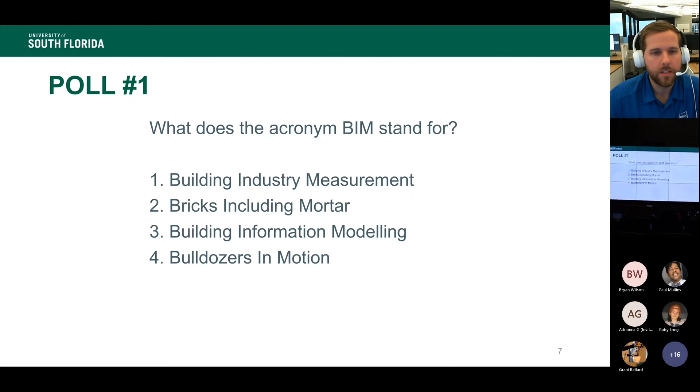So I see some of those responses coming in, that's good. We're going to transition here to, I guess, spoiler alert, I see a couple more responses coming in. So for those that haven't submitted yet, you're going to get a little teaser here, but it does stand for Building Information Modeling. So what that means is really in the context of these two parts of the industry we're going to focus on today, which is the design phase and the construction phase. There's a roadmap and a life cycle of these jobs that you guys are going to see and interact with on your campus. But to give a high level overview of that, this is really just a graphic that we like to use to help explain how building information modeling really impacts both the design and the construction phase.

So whether you're really in the beginning stages of a project with programming, to conceptual design all the way out to detailed design that you can see there on the right hand side, and then transitioning over into the construction phase where you're starting to build, obviously from that model. That's really where we start to get into some of these items as it relates to actually physically building that out in the field. So we like to show this as a roadmap of how building information modeling is this concept that runs deep through design all the way into construction, which brings up our next topic here, another acronym, VDC.

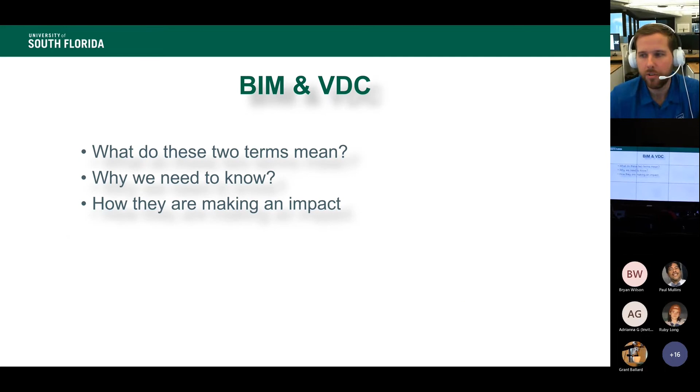So the first one being BIM, we already talked about it a little bit, which stands for Building Information Modeling. The key to this definition is that it's a noun - it's a thing or a tool, or in some cases, consider it like a hammer, right? Think of it as something that's actually physical. The key words we wanted to highlight in this definition were a digital representation of information. When you think about BIM, or Building Information Modeling, it is really a noun, or a thing, or a tool.

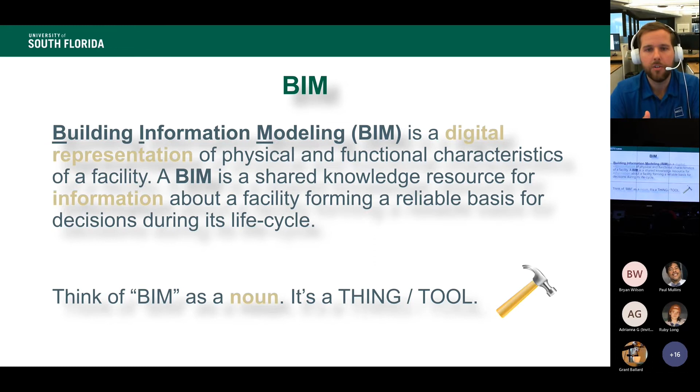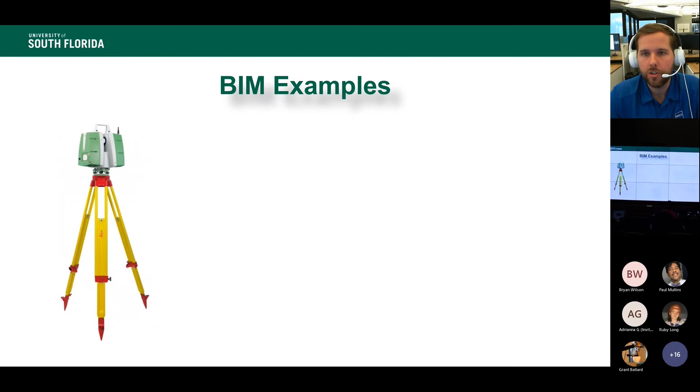The important part is to understand it is just a thing. You don't just throw Revit or modeling into a project and expect it to change or expect increased value - it's a part of that process. So another tool we would use - if Revit was more on the design side - on the construction side, another BIM tool we would use is a laser scanner, which you can see here. Typically this is known as a surveying piece of equipment, but it's something our construction staff uses to understand the built space we're either continuing to build on or starting to build from.

And so I think this is a video here that Alejandro, if you click on it, will start to move around and show you our ability to recreate this space. A lot of people have called it either a digital twin or a digital representation. I know you're getting a little fuzzy here, probably on the Teams chat or in the room, but really this is a digital reconstruction of the space, and that's done with a building information modeling tool - a laser scanner.

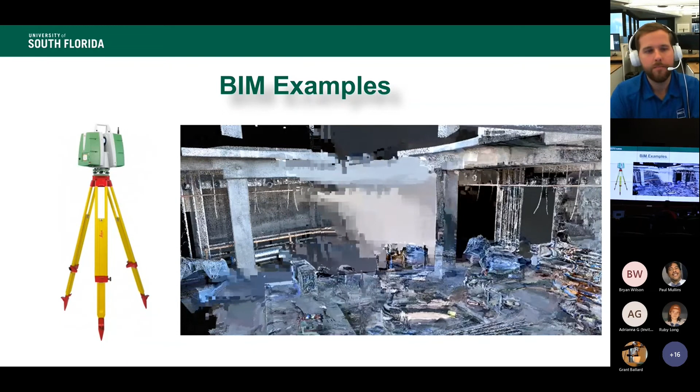So what I wanted to show you was more of the architecture side of it, with what Revit is as a BIM tool, and then on the construction side, a laser scanner, which you're seeing here. This is kind of a preface to a couple things we're going to talk about later in the presentation, but wanted to give you an example of building information modeling - it's a thing, it's a noun, it's a tool. Architecture-wise, Revit. Construction-wise, a laser scanner in this example, to give you that realm.

So the other acronym we wanted to talk about was, what does VDC mean? How does that play into it? So VDC stands for Virtual Design and Construction.

So a list here that we wanted to show is really some examples of what that means, or what are some VDC processes on the architecture side and on the construction side. What you're going to see on this next slide is just some examples of that.

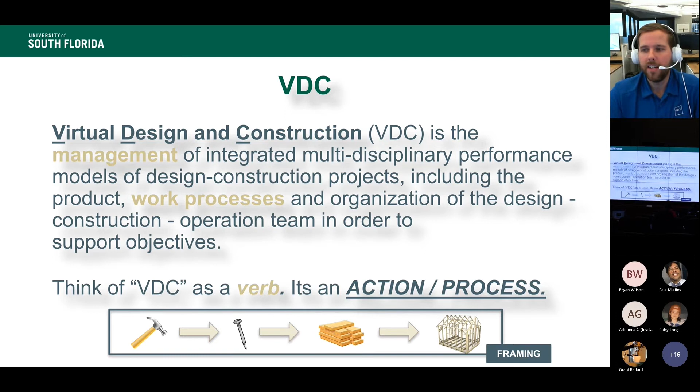So as we get to some of those actual or tangible examples on the next slide, what we really wanted to show you was this idea of what does this actually mean? What are some VDC examples or processes on the architecture side and then on the construction side as well?

Whether that's site logistics or layout or virtual mock-ups to see what these things are going to look like, again we're taking all of these tools in the BIM world and applying them into processes into the virtual design and construction world. So that's really what we wanted to give you guys, a baseline of understanding that there's a lot of acronyms in the construction and architecture industry, but two that are really important and applicable here are BIM, or building information modeling, and VDC, which is virtual design and construction.

So what I'm going to transition to is Alejandro, and he's going to talk a little bit more about what that means and how we take some of these VDC processes into action in the realm of considering what that looks like for design and construction.

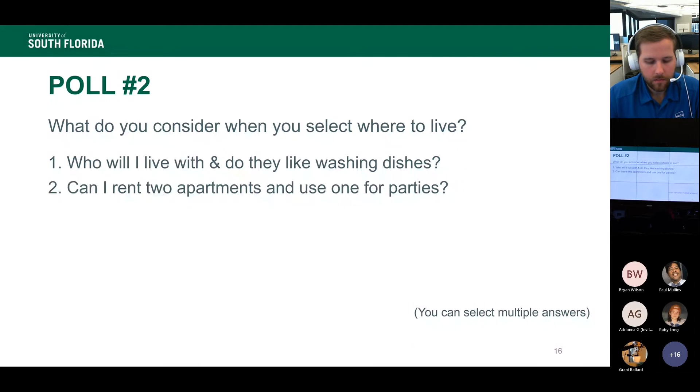What do you consider when you select where to live? I don't know if this is the first year of you living here in Tampa, but what did you consider when you moved to Tampa, or to a new place to live? Do you consider who will live with you, and do they like to wash dishes? Maybe. Do you consider renting two apartments and using one for parties? What about, does the apartment have hyper-fast internet because you want to watch movies on Netflix and stream video games? Or do you just say, I should have my apartment or house designed by an architect? What do you normally do?

BIM Execution Plan is something we do to start out a project, to plan a project. So just the way you guys are planning out where to live, we have a BIM Execution Plan that talks about who you're going to live with, right? Who are the team players?

Do they know what you need for them to know in order to be part of your team? Do they have the capabilities? Do we have the software? Do we have the hardware? Do we have all the technology needs in order to do this project?

In a way, that's what you think when you're looking for a place to live. USF has their own BIM guidelines and standards. A lot of other companies and institutions have this. So if you work for a hospital, like the VA hospital, or the U.S. Army Corps of Engineers, they will have a BIM guideline. They will have a standard of how they want the projects to be.

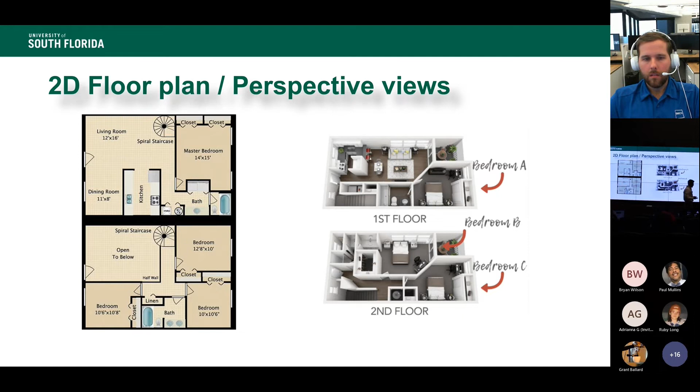So again, we're going back to the apartment you're going to live in. What do you normally do? You see this 2D floor plan, right? It tells you where things are at, where the bedrooms are, the restrooms, bathrooms, the kitchen. And nowadays, a few companies provide you a 3D and isometric view of that. That's pretty common, like when you go look for a house on Zillow.

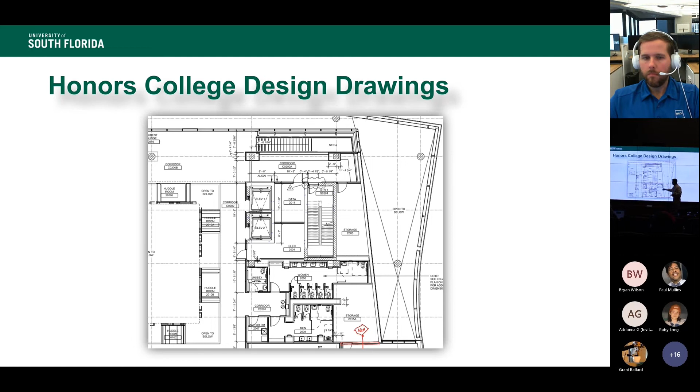This is a floor plan of the Honors College 2D drawing. It's just flat, just lines. It's showing us that level, this specific one, level 2. This is a zoomed in version of level 2. So we have the restrooms, corridors, some elevators and stairs. It's showing us in 2D drawings the location of that.

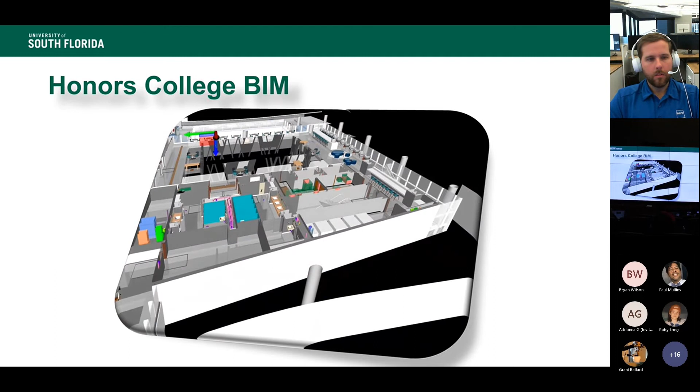We can also do that in a 3D model, and from the 3D model we can actually export it. So the information from the model can be exported. This is just a little video of that model where we extracted the 2D drawings from. This is the Honors College, where at some point you'll be working, having a coffee, going to the restroom, walking up and down the stairs.

So there are design drawings, just as we mentioned, and there are fabrication drawings. What's the difference between both of them? Anybody know?

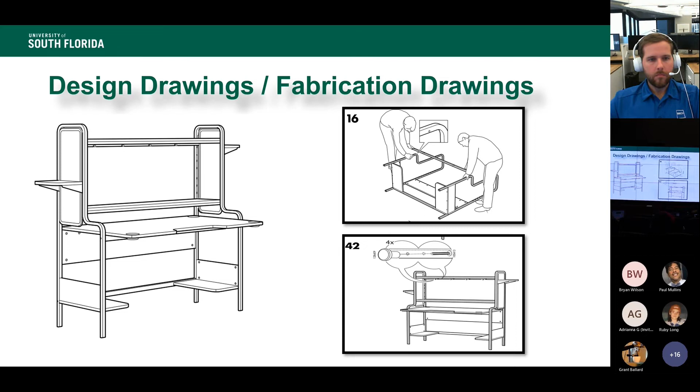Okay, so it's more of a detailed version of a drawing. Perfect. So most of you maybe have bought furniture at IKEA, and you know how those manuals come, right? 42 steps to build that. What is that, I think that's like a desk, a gaming desk, right? 42 steps for you to have a gaming desk. So remember we talked about knowing your team, and if that team knows how to wash dishes, well this might come in handy. You might need to work with and live with someone, so they can help you put that furniture together. So that is right, thank you for that.

BIM has dimensions. Today we're only going to talk about 2D and 3D dimensions, but it also has more. 2D, we talked about the drawings, just floor plans. 3D is that geometry, right? The 4D is like an animation of that. So when you're playing video games or watching those animated movies, it's an animation of the project, of a building, of how it's going to be constructed, and it's tied to time.

Number 5, it's cost. So just like if you go to an Amazon store and you can buy certain things, you have a cost tied to that information or to that object, to that 3D object. 6D could be sustainability. So nowadays everybody has an Amazon device at home with smart devices you can turn off and turn on. Sustainability could give you information about the source of that material, where it's coming from. It could be used for LEED.

LEED certification. And 7D, a lot of people in the industry say it's only 6D, there's no 7D, but it's actually evolving. Now we have 7D, we have 8D, we have more. But facility management is now, you have a building that you can have information for your facility management tools.

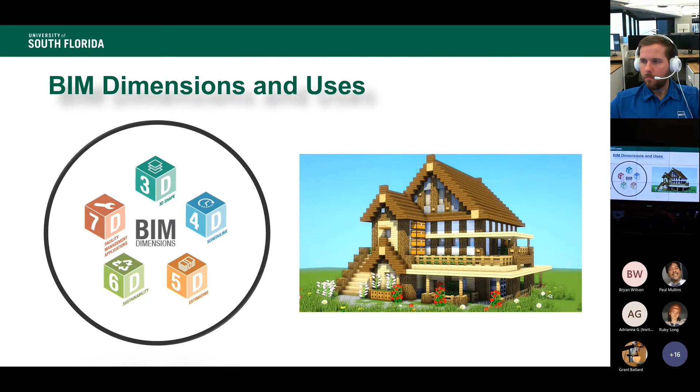So probably you guys have played Minecraft, right? That's just a 3D representation of a house, but it's not really detailed. We don't have 4D, 5D, 6D, or 7D in that, it's just geometry, just generic boxes. So that's important for us when we're modeling. We want to define what we're going to model. Can we have a box representing that house, or can we have the actual perfect geometry of that figure?

So let's talk about a kiwi. Everybody knows a kiwi. The LOD would be the level of detail.

So how do I want that kiwi to be modeled? Can it be represented by a cylinder, by a kiwi, or by a box? How do I want that to be detailed?

And then the information, right? When you go to the superstore, Publix, or any superstore, you look at the kiwis and you know where they're sourced from, right? They could be from New Zealand. You can know the price, but that's all the information you know. You don't know the color, you don't know the smell, and the expiration date. So you might want to have more information in your 3D model, in your BIM model, your information model.

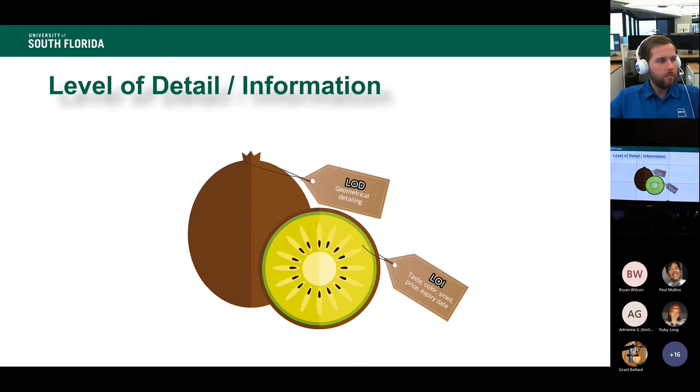That's part of the LOI. I'm going to hand it out to Stephen. Thank you.

All right, good with the microphone, Steve? All right, great, thanks. Hey everybody, Steve Blumenbaum. I'm the Director of Construction Engineering for Walter P. Moore, and we were the structural engineer on the USF Honors College.

So this slide is kind of interesting. Out of curiosity, how many of you are in the architectural engineering, building construction industry major? Okay, a few of you. That's good.

So the industry is sort of on the cusp of a transition between two different paradigms, I think. Historically, like Alejandro was saying, buildings were drawn in 2D, right? And then somehow they became physical 3D objects. And right now, given where we are with technology and speed of projects and what we're capable of doing virtually, we are transitioning from 2D to 3D.

We're going straight to a 3D virtual representation of the project, then to a physical representation. This is sort of like underneath the hood, what we're doing these days to try to get there. Historically, on the top left-hand side of the slide, there's a design team saying we've put together a design model that's at a certain level of development, not ready for fabrication, but good enough to do drawings, that we spent maybe years or months making.

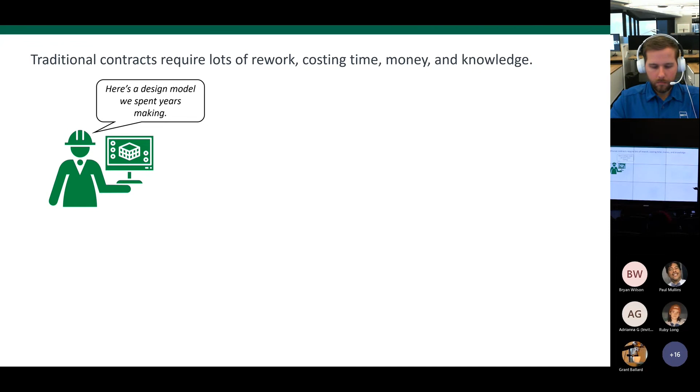But it's just for reference, right? Somebody else needs to go and create the fabrication model, create the fabrication drawings. But you can use our stuff that we designed for reference. The contractor says, great, thanks, I'm going to go out and get my team to put together a fabrication set of drawings, a fabrication model from all that design reference information.

But all these guys over here working on the build side, they've got questions. There's missing detail, or there's unconfirmed details that have to eventually get figured out to get the building built. So they're going to send through RFIs, requests for information, back to the designers. And now they've got a fabrication-ready model that can go into production for structural steel or reinforced concrete or what have you.

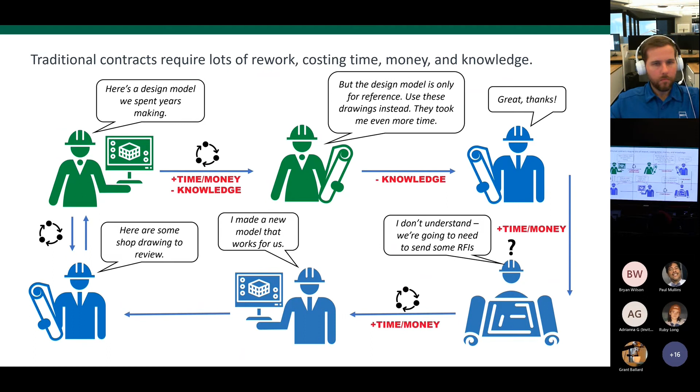And then they send it back to the design team to ask, hey, does this meet your design? If it doesn't, or if it does, okay, so this process is obviously cumbersome, and it's being compounded in today's environment by desires to go faster and increase design ambitions. There's time, money, loss of knowledge, loss of time, loss of money through this entire cycle.

And so there's benefits to early coordination on the virtual side of the project. If you can get the entire building figured out all the way to fabrication level, you can solve a lot of these headaches. And that's where we are.

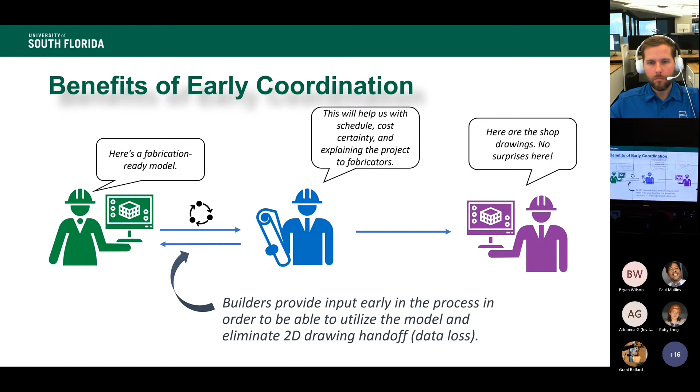Certainly this is the process that we followed on the USF Honors College project, where we reformatted project delivery working with the BEC team to say, okay, instead of this huge do loop, complex project that we want to achieve a certain schedule on, let's go directly to fabrication level modeling, all on one side of the equation. Eliminate the RFI do loops and confusion about design intent. Make sure everybody on the build side has a better understanding of what needs to get into the physical environment right away. So there are some benefits to the early coordination here.

Back to you, Alejandro? Okay, go back to the coordination part. Thank you. Are we good on the mic? I think we should be good, right? Yep.

Stephen talked about the differences and advantages of having an early design and involving a lot of the team members. Construction coordination is a little bit different. So what are the differences for those of you that study architecture and engineering? What are the differences between design coordination and construction coordination?

Anybody? No? What do you think? No, anybody? I think you want to participate, right? No? Okay, I got it.

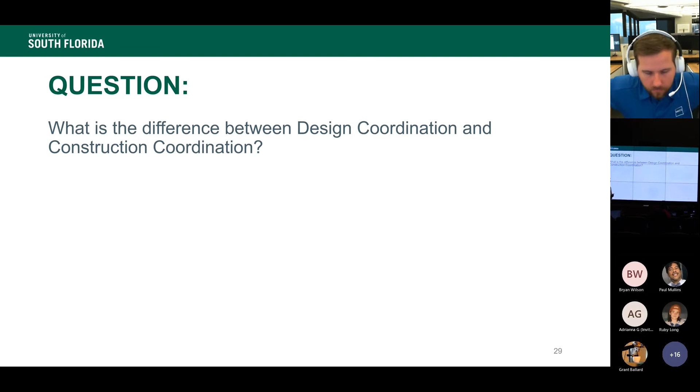Well, the differences are in design coordination, we have the engineers and the architects doing that coordination. The construction is where you have your plumber, where you have all your trade specialty teams doing that coordination. And you might have some of the architects and some of the engineers in those coordination sessions, right?

This is the MEP coordination process long time ago, before you were born probably. We had light tables, we would put paper on top of a light table, or a piece of paper on top of another piece of paper. We would overlay those and see how the installation overhead was going to work. But it was a cumbersome process, and it was a 2D process, so we had a lot of issues with that. We also had overhead projectors.

Any of you worked with overhead projectors? Nope. You have. How come? You look very young. Elementary school. Elementary school. Okay, so in elementary school you did get some of these. Okay, but not anymore, right? You don't see them at USF. You don't see them anywhere. Perfect.

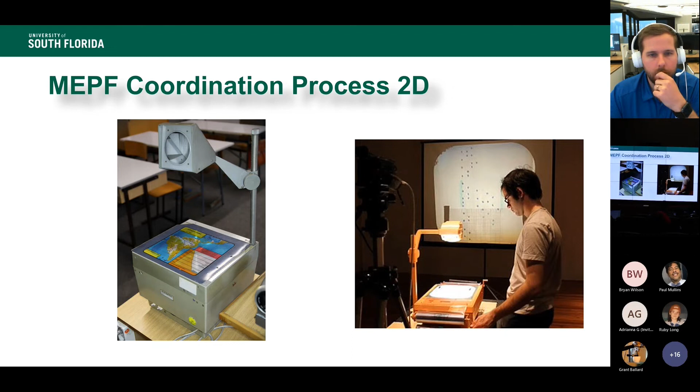Those pieces of plastic, paper on top, right? And we would overlay, and we would see that the installations would work. So this was a process, right? We would draw, we would coordinate, we would produce information that then the teams could use for fabrication, and then the teams would fabricate. Pretty much, that was it. It was an easy process.

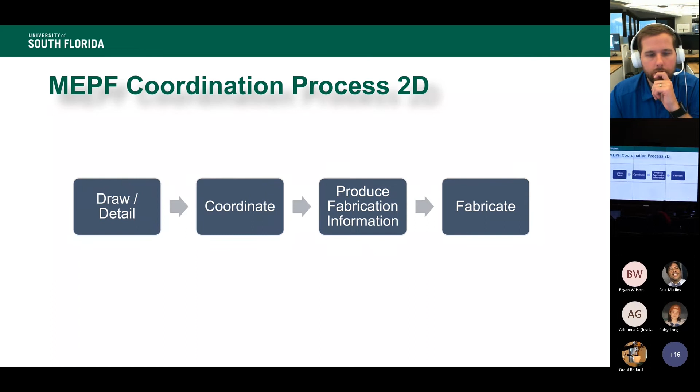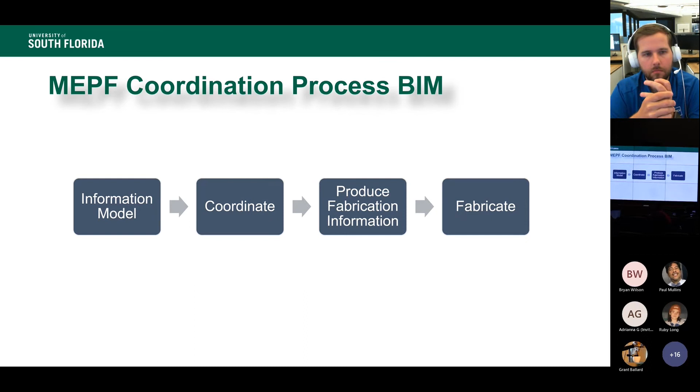The difference with BIM, you can see the only difference I've identified here is now you have an information model. So forget about BIM, remember information. The important part of BIM is information. Some of you are studying IT, right, going for technology, information major. So the information part of a building information model is the most important part of it. So we have an information model. It's a 3D geometry, as we mentioned. It has 2D drawings, and we could put a lot of other information in there. That's the difference between the previous process, which was only 2D drawings, not a lot of information.

So you had one job, right? We've seen this happen sometimes in our houses and the places where we work. BIM coordination tries to improve that through the most known clash and interference, clash detection, interference detection. Also, clash avoidance—we are trying to avoid issues, not only find them, but let's avoid them. And then design review—we could also work with the architect and the engineer and check that the design has been reviewed.

We can look at the model, and for example, we were talking about you guys looking for an apartment. Do you want to have 2 rooms? Do you want to have 3 rooms? Do you want to have 1 restroom or 3 restrooms? That would be part of the design review. You would have a model. You could talk to the engineer and the architect about that.

Constructability, we'll talk about that one with the model here in a minute. And then operations. So look around you, everybody, please look up. What do you see here? You see some lights—they're the light fixtures on the same location up here.

What about over here? Does this look correct? We got some air diffusers here. These don't look aligned, right? That could be part of the design review, but also constructability. Do we also want to do that? Was this an issue by the architect, by the engineer, or by the construction teams, right? Why don't they look aligned? You can see that right away, right?

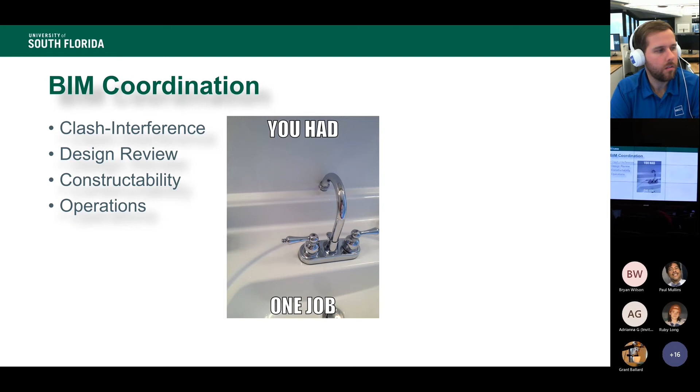So the model helps for operations also when you need, for example, at your home, you're opening up the fridge. You need a certain clearance so you can open up your fridge, right? So you can access your fridge. For equipment, you need a clearance and you need operations—you need to think with the end in mind and with the future of that operation.

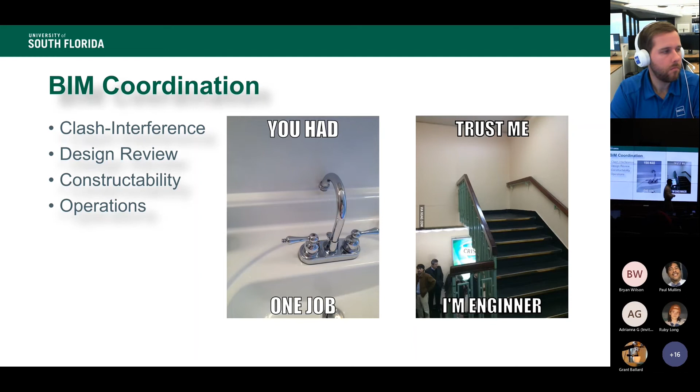A lot of engineers will have issues just like this one, but you got to trust them, right? Trust me, I'm an engineer.

So I'm going to open up the model so we could start looking at it. And for those of you online, please give me a minute so I can share my screen.

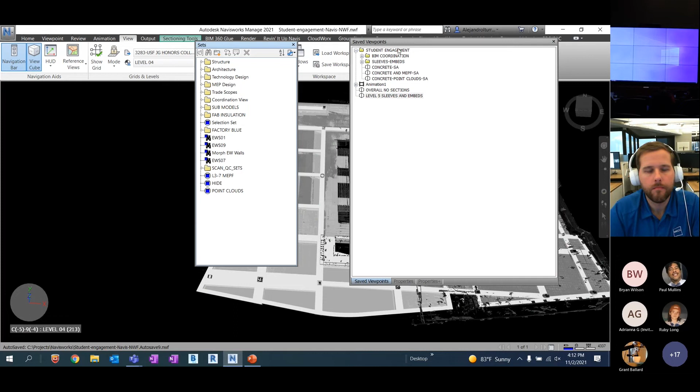All right, Grant, can you see the model? Give me a thumbs up, please. Great. We can't see it on the big screen, right? Grant can see it. That's a little better.

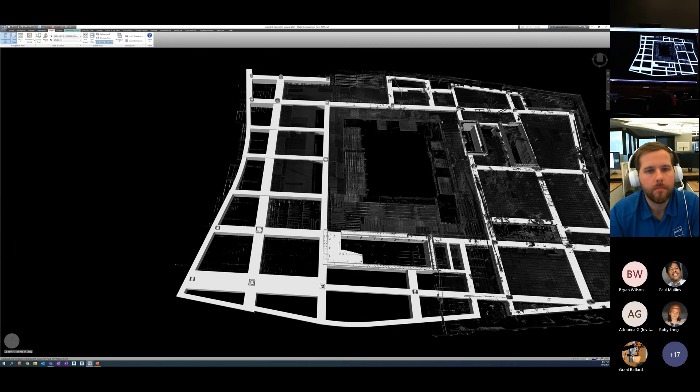All right, so let's look at the model. This is the USF Honors College model. I brought a joystick with me today. Who wants to try out the joystick and look at the model? Come on, you play video games? Some. All right, so just like a joystick, you can play around. You want to try it? Give it a try.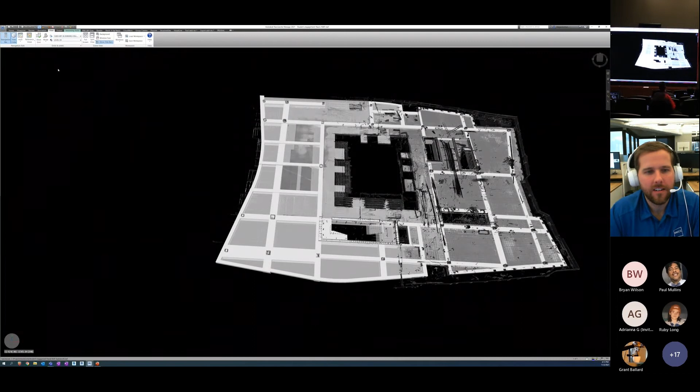All right, I'll show you here in a quick second. Let's look at a few views before we go to that.

These are examples of clash detections. Oh, that one doesn't look quite right. It actually does a little. So what you see there in the pink, that is a duct like we saw earlier in that picture. The duct is clashing with a cable tray. That's an example of a clash.

We have another example here, 3D view, isometric view. So these are examples. The brown is a cable tray, pink is a duct, the red is the fire main. So we have a few clashes there, right? We don't have enough space.

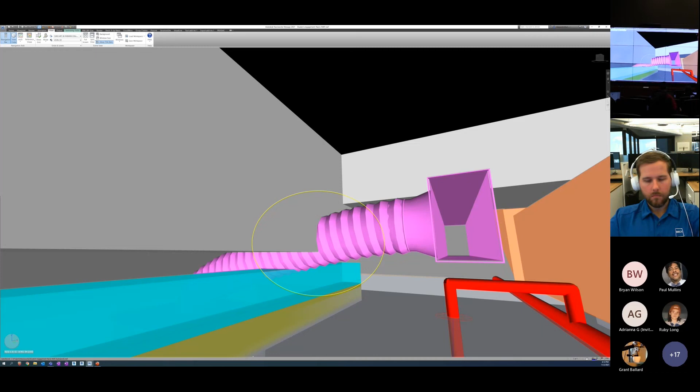So what we're using the model for in this instance is to understand geometry versus geometry. Can that fit? We have a concrete beam here. Can that fit here? Can our flex duct go underneath this concrete beam? We start looking at the model and identify any constructability issues, any clashes, any design issues. Here's another one, the same flex duct clashing with the concrete beam.

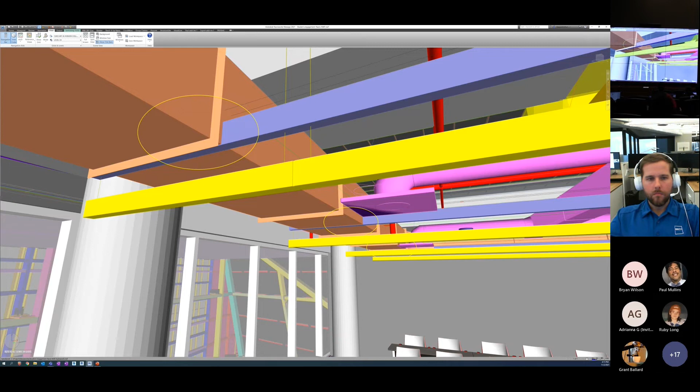And then light fixtures, we also saw an image of a light fixture earlier. That one is clashing there with a duct. You can see that duct orange up on the top. So we could talk to the architect and the engineer and let them know about that issue, and they could provide us information if they want to lower the duct, make it smaller, or whatever they want to do in the design. That's another example there of the same issue.

So we were talking about aesthetics, and we looked at the diffusers here, and we looked at the light fixtures in this room. So we also wanted to check with the architect if they're good with that design.

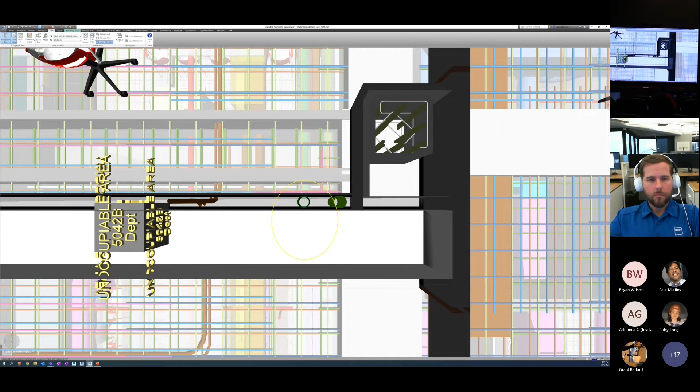A constructability issue here that we found in the model was we had these two pipes. We're looking down a floor plan. We have these two pipes in the middle of the wall, and those pipes are pretty big for that wall, so we want to let the architect know, and if we can make that wall thicker, that could be a constructability issue.

And we talked about the clearance issue, operations. So we have a panel here to your right. What you see here in transparent green, that's the clearance. People will not be able to access and put their hands in there and work through here or work on the panel because there's some pipe right in front of it. So that's something that we also identify with the model. And this is another view of that.

Let's play this animation just really quick. You're going to have to forgive me, there's a few. Oh, I can't see it. Is there a play button there? There we go.

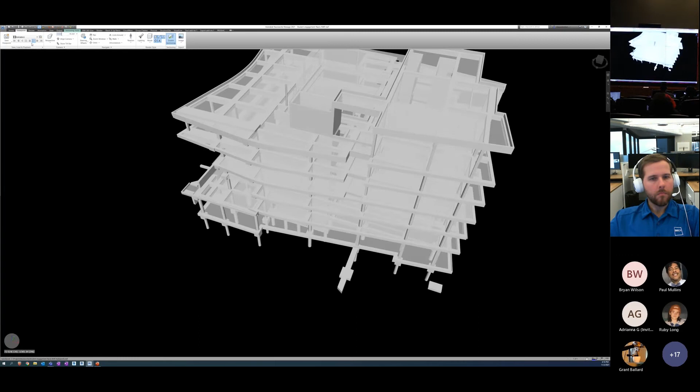All right, I'll take that back just for a second and I'll show you how to do it. So turn it off - that's going down, up, turning to the sides, front, back, left, right. Just give me a minute. So this is the construction model of the concrete, and we have the... give me a quick second. Yeah, it moved away. Can we turn that one off for a second? Yeah, yeah. All right, let's go back to that one.

Technology is great, but we also have sometimes a lot of issues with it, right? It's getting there, though.

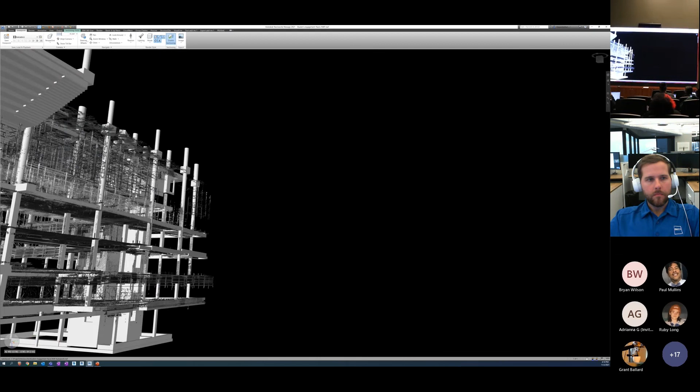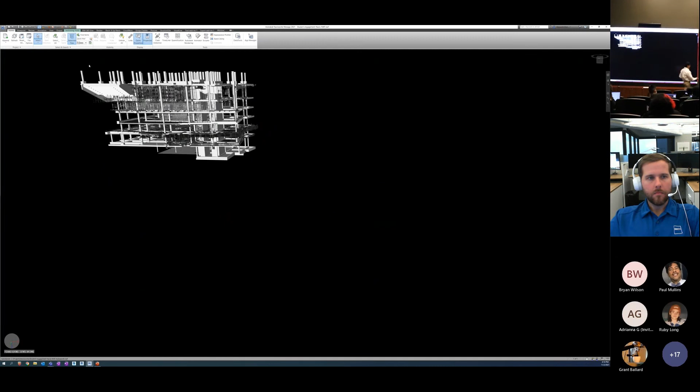Okay, I'm going to have to move it away. Thank you, I'll just do it from here. Why don't I just sit down and do it from here? Can I do that? All right. Let's stop this animation. It's upside down now. I'll have to do it from here. So sorry, guys. We're back on that one. I'll just do it from here.

So that's our model. Right now it's only showing the concrete. You could see all the levels there. If we have a point cloud, which is a scan of the conditions in the field, we could show it also. Right now this model shows the overlay of concrete and the MEP services, so all the duct and pipe we're looking at. We start putting a lot of information into our model from all disciplines.

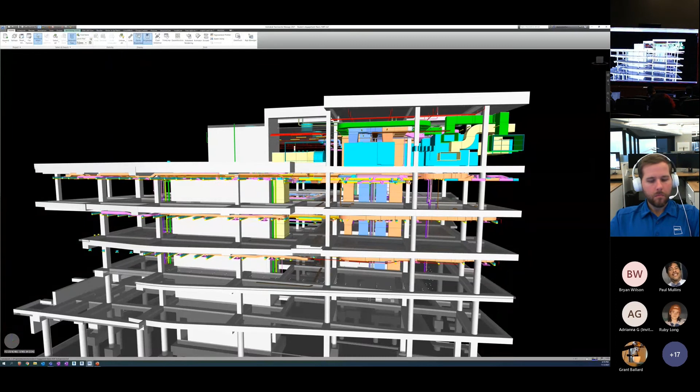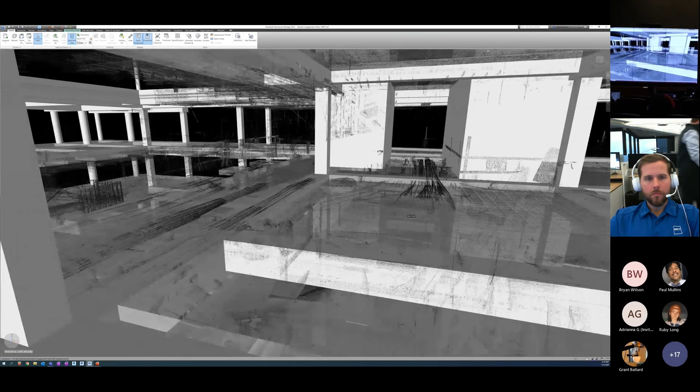This one now shows the point clouds. That's a scan, and Grant will talk about the point clouds here in a minute. That's a scan of the existing conditions at some point of the building. All those lines there are reinforcement bars. If any of you have worked or walked next to a construction site, you've seen that rebar. Those are millions of points in the scan that show us the existing conditions. Grant will talk about that in just a second.

Grant, I'm going to hand it off to you here. Give me a quick second.

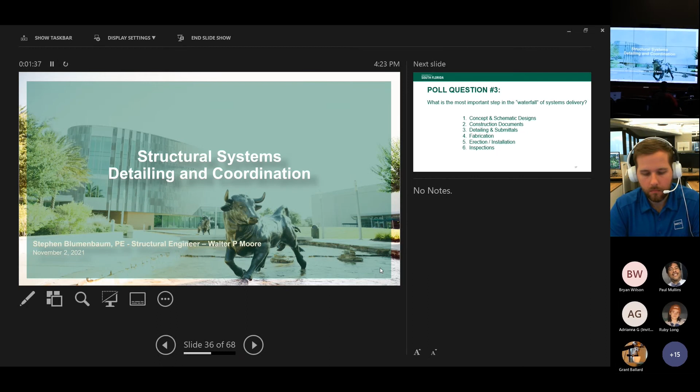All right, my poll question is: what's the most important step in the waterfall of systems delivery? We'll talk about that in the next few slides, but you can put your answer into the poll.

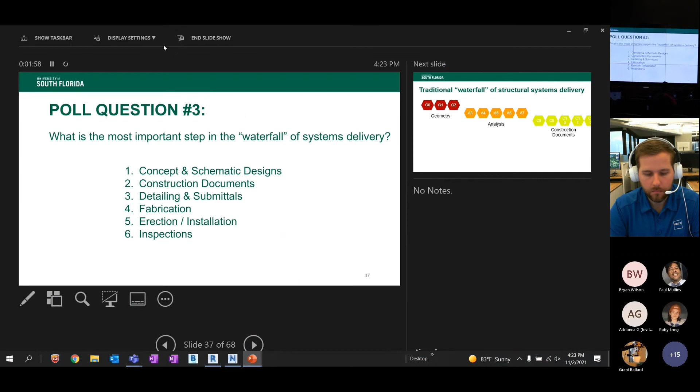I guess Steve has it running. Whoops. You want to put it back into presentation? We have nav up.

There we go. Okay, most people are saying the design phase. Okay, very good. For this, what's the most important step?

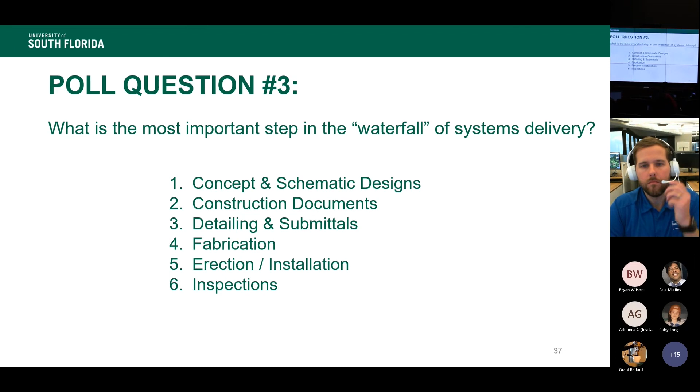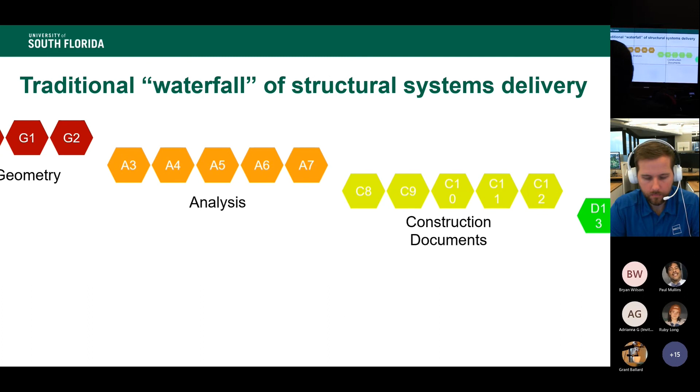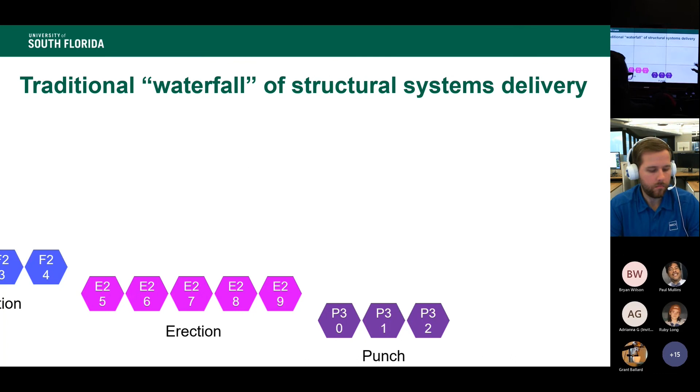The truth is they're all important, they're all critical. They all add a certain amount of essential information to the virtual model before the project goes physical. Just very roughly, when I say waterfall of structural systems delivery, this is what we have in mind - the traditional way of thinking about a project. You start all the way over on the left with massing and general geometry, then you work through your analysis programs, your construction documents, detailing, all the way to the project going physical, erecting it, and going through your punch list. Well, this process is getting squeezed and accelerated, with multiple systems and multiple teams working on the same information in sort of an iterative do-loop. Again, it's cheaper and easier to do that in the model before the project goes physical. Once it goes physical, you only get one shot at getting it right.

On the design side, this is a little bit about what our process looks like - left to right, sort of moving down the waterfall.

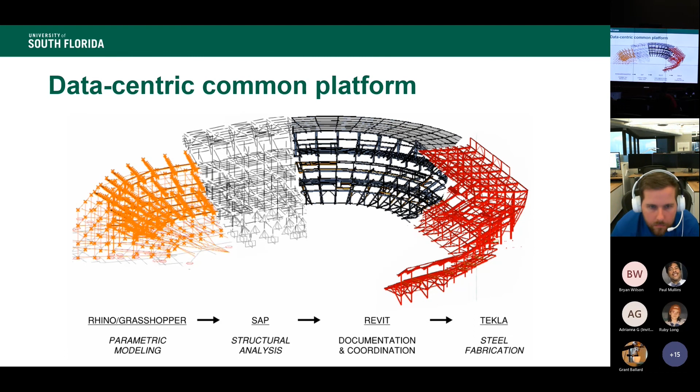This is a project we did a few years ago, but having systems in place on the design side to move information around to the different platforms you need to deliver the project is super important. Analysis models - this is SAP, which we use frequently for structural analysis. You heard the term Revit earlier.

Tekla is another software platform used in our industry for fabrication modeling. How do you do this? You're not going to be doing it manually. You need to build systems to move information around where you need it. On our side, on the design side, we've built proprietary methods for making that happen.

You can walk through what we were observing years ago, trying to use different software platforms. Revit on the left is what we use for coordinating with architects. Tekla on the right is what we use to create fabrication level information. So you've got to move a beam from Revit to Tekla - how do you do that? Do you manually redraw it, or push it through intelligently with custom automated tools? We've taken the latter approach.

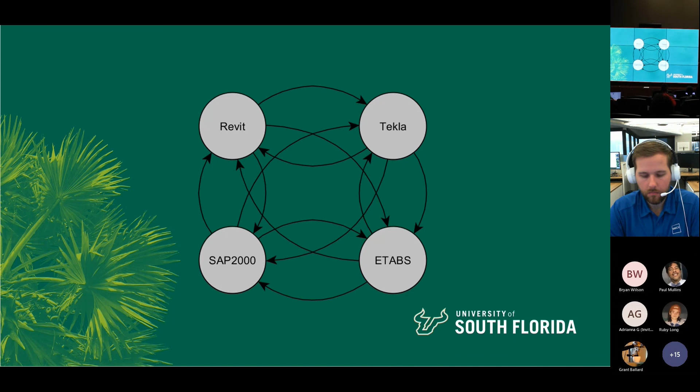If you try to do it manually with multiple software programs, as you keep adding them to your process - analysis programs like SAP 2000, ETABS is another one we use to design columns and beams - you have this geometric increase problem. You do that more and more, and pretty soon you're just managing information flow and not designing anything.

So on our side at Walter P. Moore, we've developed this structural interoperability database to keep data as data. Our columns are not virtual elements, they're pieces of data that we can move to different spots in the delivery process as necessary. This is what allows us to iterate and coordinate with other members of the design team.

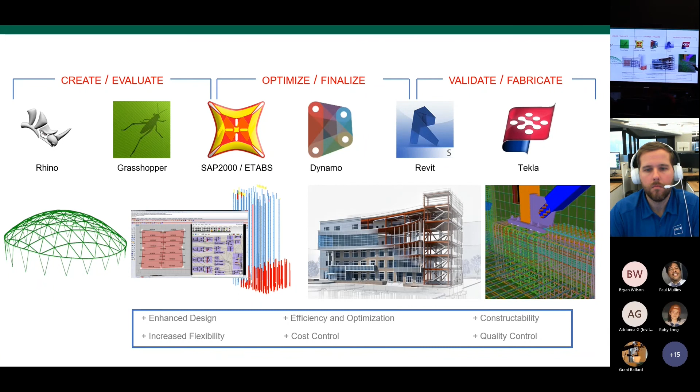Kind of summing up, this is our general process that we've built, and we've taken on a 5 to 10 year journey to get to the point where we've got this SID built and we can move information around like I was talking about earlier.

Tekla, I mentioned, is the tool we use for fabrication level modeling. Once a project gets to that point, that's where it's able to go physical. From the fabrication level model we've developed in Tekla, we can export CNC files - that stands for computer numerical control. These CNC files are literally instructions to machines on the fabrication shop floor on how long to make a beam, where to drill holes, and that sort of thing.

All of that is automated at the structural steel fabrication level or the reinforcing steel fabrication level. Then those submittal drawings I was talking about earlier get exported from the fabrication model as well. If we've done this intelligently, that's just a check-the-box step rather than a design-on-shop-drawings step. Field use drawings are created from that model, and that's what goes out to steel iron workers, rod busters. Typically, the field use drawings is what you'll see out on the job site if you're walking around making these tours.

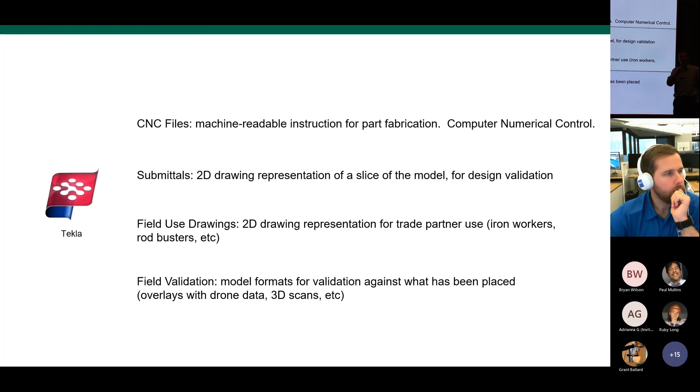And then it can be used for field validation. Alejandro was working with fabrication level models that we had exported from Tekla for the reinforcing steel.

Okay, this is back to Grant, I think, right? Okay.

All righty. Can you guys hear me? We can hear you, Grant.

Perfect. Well, let's launch the next poll question here and kind of transition things towards getting out in the field. So a fun poll question here.

What are lasers used for in construction? We've got a couple different options here: cutting, measuring, marking, all of the above. I feel like we're going a little futuristic here on the use of lasers, but what would be y'all's guess on what they may or may not be used for?

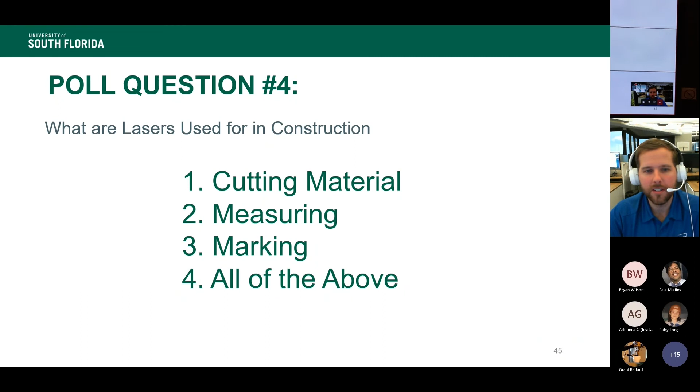Seeing a pretty heavy response in the all of the above, which would be correct. So we're going to dive into one of those here in that realm of laser scanning. We talked a little bit about this at the beginning, and a lot of what we've discussed and been focusing on has been the virtual world.

So we're talking about models, coordination, how all these systems get built virtually before we actually build it physically in the real world. But a big gap our industry has is what are we doing to validate what's being installed in the field actually matches the effort put in to build it virtually.

This virtual design and construction process of laser scanning is one of those methods we're going to talk about, in terms of how we're using it out at USF with a bit more specificity. If you click on this video, it will describe what laser scanning is, and I'll talk over it a bit as it plays.

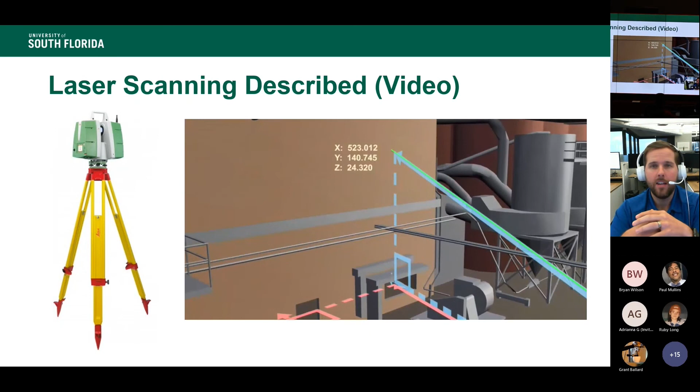This surveying equipment emits a laser you can't see, denoted in green here. It rotates around and hits objects in its path. As it spins, it's collecting data and information from that position, and locating its position back to the scanner itself, knowing its coordinate based on the distance and angle from the scanner. Think of this as a laser tape measure on steroids, spinning around and collecting all these pieces of information.

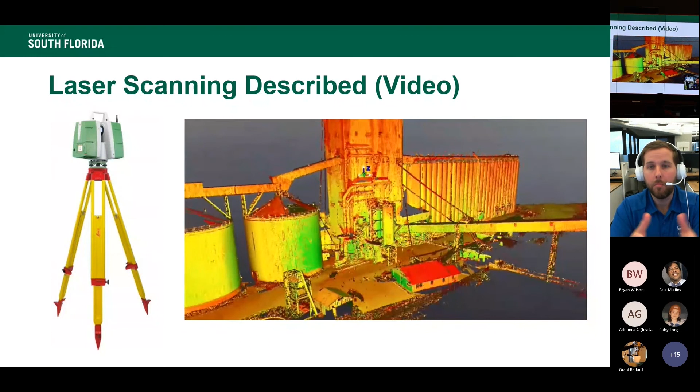What you're seeing here is a point cloud, a physical representation of the space that is captured. In this case, this was an oil refinery plant, and it captured the existing conditions.

This is a method we use to validate what is being done in the real world is matching up to the time, energy, and effort spent in the model world to make sure it's correct. So we have the real world living over here, the model world over here. How do we bring those two pieces of information together to make sure what we're doing is correct and valid?

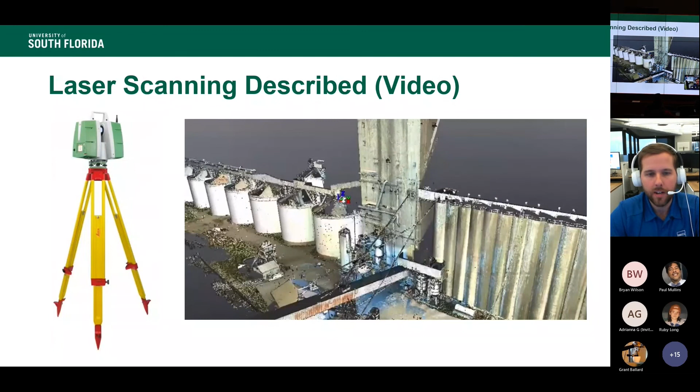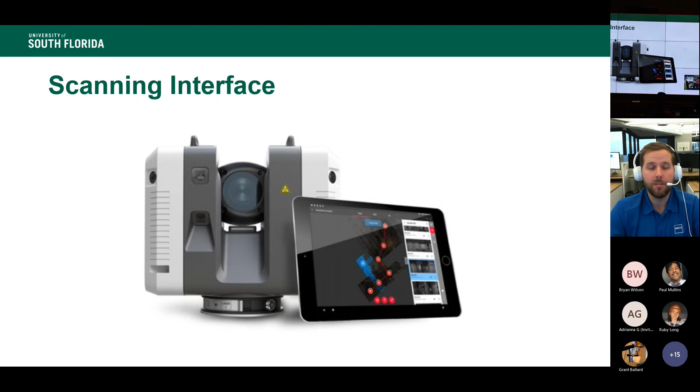There's a lot of different parts and pieces to this, but the best part is it's gotten very easy to use and streamlined, even for someone like me with very little experience. But if you give me an iPad and a couple of YouTube videos, we could teach you very quickly what this process is like.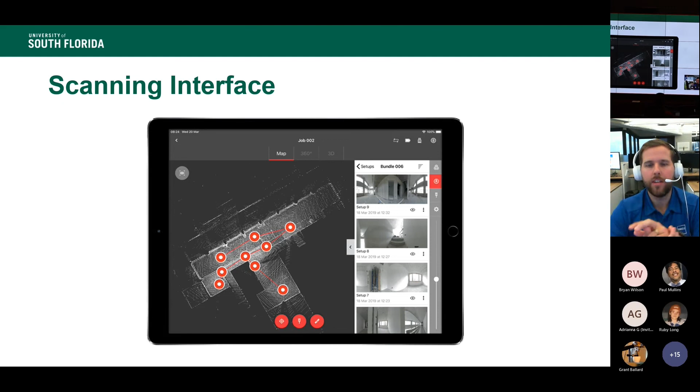In the laser scanning world, these red dots you see are called setups. You take your scanner, set it up, capture its conditions, it rotates around like you saw in that video, then you move it to another location, and we combine those scans together. So step one is scanning in the field, step two is combining all those scans together, and step three is bringing that into the model world to validate what the real world looks like versus the model world.

That's the three-step process we've been doing out at USF on the Honors College to validate and make sure what we're putting in is correct versus what we've spent so much time coordinating in the model world. Some examples of when things don't go right would be what you're seeing here.

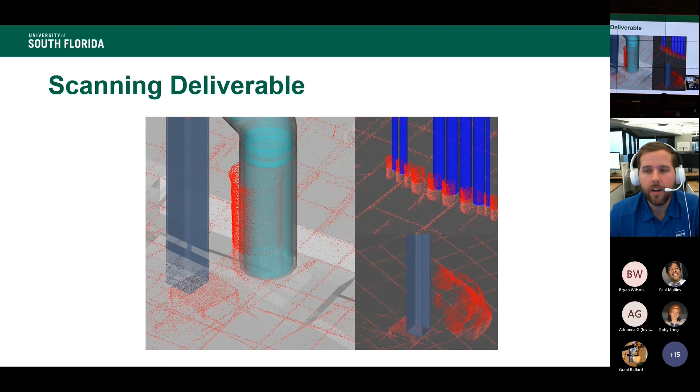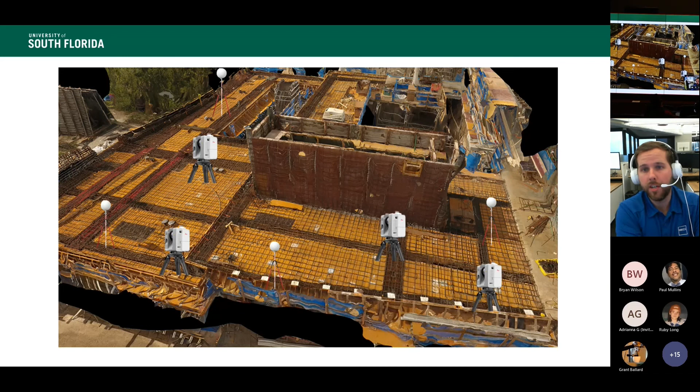The purple boxes are what we call the site control. There needs to be some piece of information that ties this real world to the model world, which is what you're seeing here in a top-down view. Once we have that all combined together, that's when we bring it into the model world, what Alejandro was showing earlier.

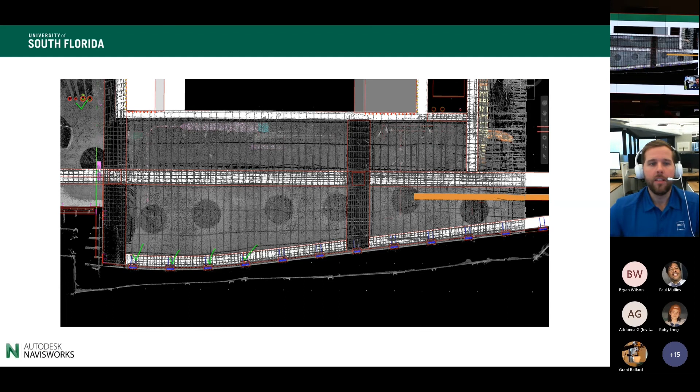This is the closing of the loop process - we spent all this time in the coordination world making sure the models are correct and everything looks good, but now we need to bring in the real world as part of that to make sure what's actually going on in the field is visually correct with what we modeled.

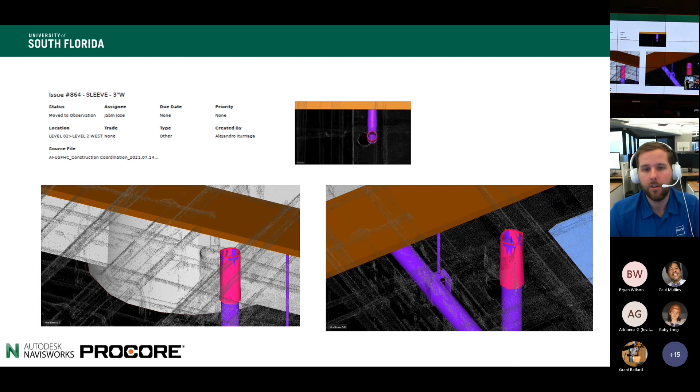These are examples of where things don't go right, and we get to catch that and make sure they get corrected before we pour this concrete, which is set in stone - it's forever in place. Otherwise we'd have to make adjustments that would take a lot of time, cost, and money.

So again, we talked about the BIM world, which is the model component, and the VDC side of it is what we just walked you through - what reality capture or laser scanning looked like. I think Alejandro is going to take it from here, land the plane, and talk about where we see the future of this stuff going with some other applications.

To close out, what are the synergies with other industries? What are the future applications? How do these technologies apply to what each of you do in this room, and everybody listening to us online? So what is the future of design and construction?

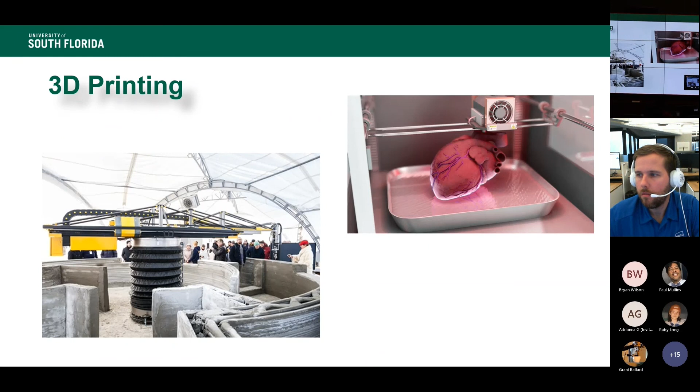We've all seen 3D printers nowadays - they're very common, they're cheap. We are using 3D printers in construction. We have automated procedures to have a 3D printer out on a construction job site, print in concrete and steel. We also apply that to printing organs.

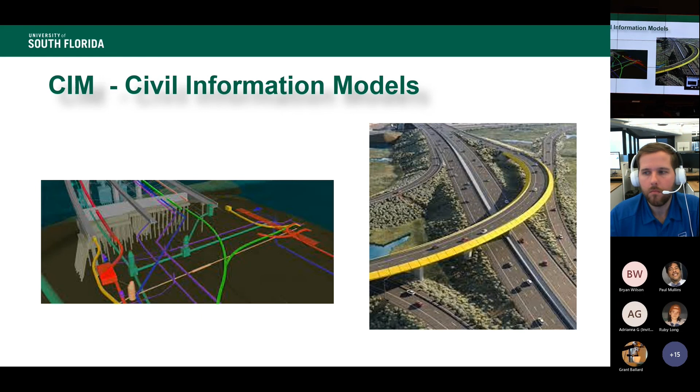We talked about BIM a lot today, but we also have CIM, Civil Information Modeling. As mentioned before, we have an information model, and if we want to use it for buildings, that's BIM. If we want to use it for the civil industry, it's CIM, encompassing roadways, bridges, and any underground utilities that are part of a civil scope.

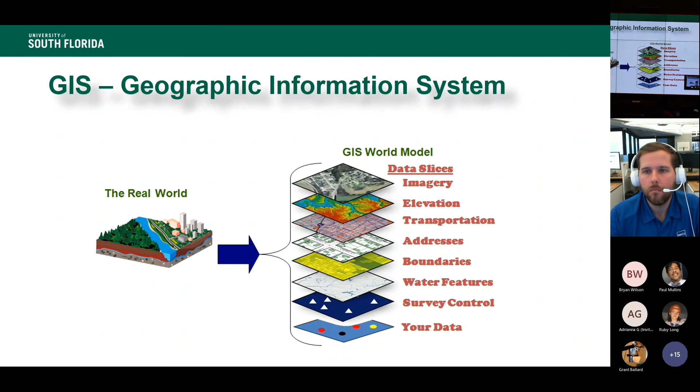Some of you have heard about GIS, Geographic Information Systems - that's been around for a long time. Now we're using it in Google Maps and in a lot of tools to get from point A to point B. In the future with smart cities, we're going to use this a lot more, tying it to the BIM models and CIM models, bringing it all together. So now we have a smart city - a database of a lot of information about a city, including buildings and everything around us.

Some of you have already played VR or AR games. We also use those for our industry to design out in the field, to verify that the conditions in the model are actually being installed in the field.

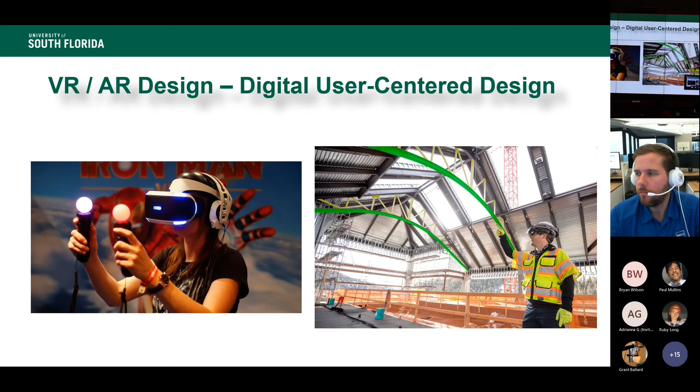And those technologies are also being used at the moment with healthcare, right? And they could be used for a lot of other things. One of them being user-centered design.

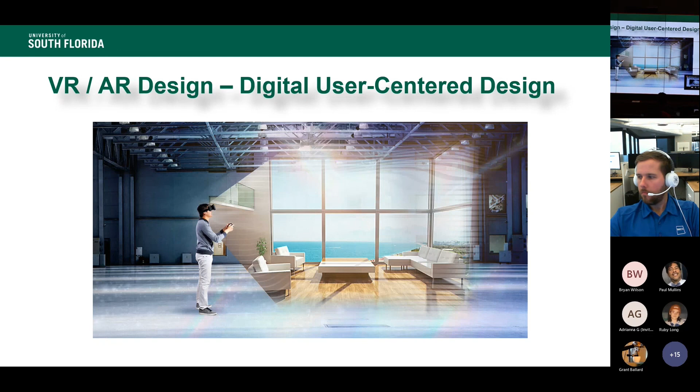So right now we're designing buildings with what the owner provides us, the input that they give us, what they want to see in their building. But what do you think about having the doctor from a hospital coming into our design team's office and putting on a virtual reality headset and telling me, no, I don't want the beds there, I want them on this side because I'm left-handed or right-handed. This is going to be my room, this is where I'm going to be working every day, so this is how I want my design. It's going to be more user-centered design, but we're going to be using those technologies.

So with this, I'd like to finish and pass it on.

All right, so to kind of drive it home, a lot of this is geared about efficiency, accuracy, and economy, because everything, the mighty dollar drives everything. But ultimately, it's about simplifying the process. I mean, way back when I was...

So when I started my own architectural firm, I used to laugh because my wife kicked me out of the house and made me get an office for my firm, because I turned our glass top coffee table into a light table so I could overlay certain drawings and do that coordination like you saw back on the screen. Now they're doing all that electronically.

And what's really cool is not only are they doing the coordination electronically, but the fabrication too, as you heard Steve talk about. Back in the day, we would get the design drawings, we'd get the shop drawings. It was always the young architects, the intern architects, who had the job of checking the shop drawings - looking at one set of drawings to make sure the beam was the right length and height and actually fit and connected with the other beam. Right now, Walter P. Moore is actually doing that in their shop.

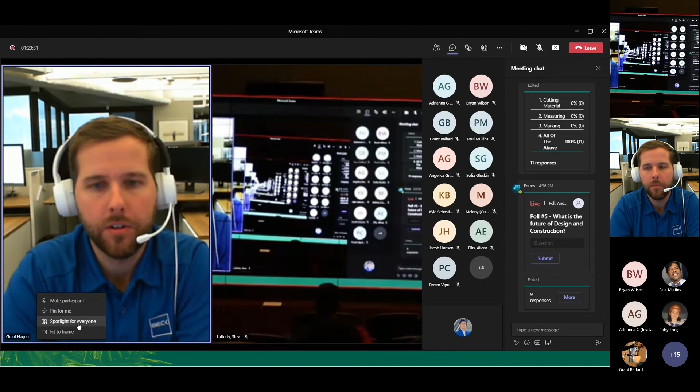Some slabs, and this one in particular, have what they call post-tension, which just means we stress the concrete slab after we pour it to make it a little bit stronger. Going back and drilling into that slab after you tension it leads to a lot of issues. So in our case, we really wanted to make sure that everything that got put in the slab was 100% correct before we poured it. That's why we said it's best for us to scan before any concrete is poured, to make sure something gets caught if need be.

I would say that's not very common, but it could be done. Obviously we're doing it in this case, but a majority of it, I'd say, is for key milestone activities before you cover up anything that wouldn't be able to be seen after the next scope of work comes into play.

So as with everything else in design and construction, there's no one right answer, no set process that shouldn't be modified for anything you design or build. For the Honors College, we have very specific reasons for scanning. What Steve mentioned earlier with the exterior scan, 75% of it is a prefabricated system, which means the level of accuracy for the embeds is critical. Same thing for the interior architectural feature. We scan for those very specific reasons on top of scanning for each concrete pour.